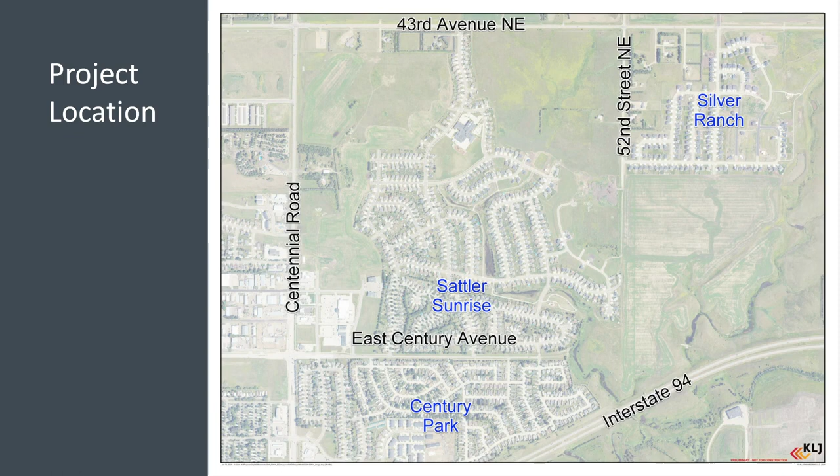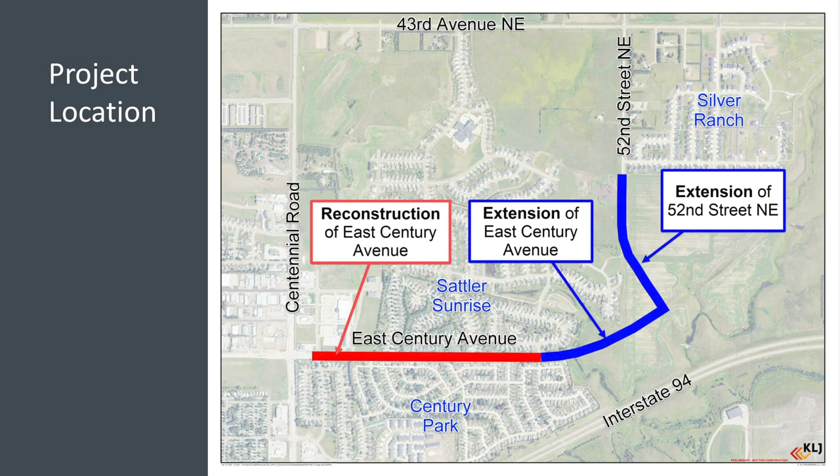The project will be divided into two segments: the reconstruction of the existing roadway and the new construction or extension of new roadways. The reconstruction segment includes the existing East Century Avenue roadway from Centennial Road to Kost Drive, shown in red. The new construction segment extends East Century Avenue further east until it intersects 52nd Street, and 52nd Street would be extended south to intersect the new East Century roadway. These extensions are shown in blue.

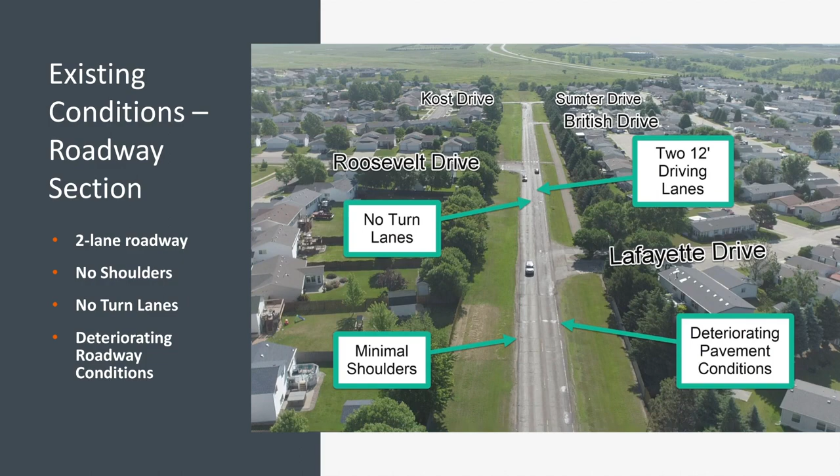The existing roadway for East Century Avenue consists of a rural two-lane roadway with 12-foot driving lanes. There are no turning lanes, and the pavement condition is deteriorating.

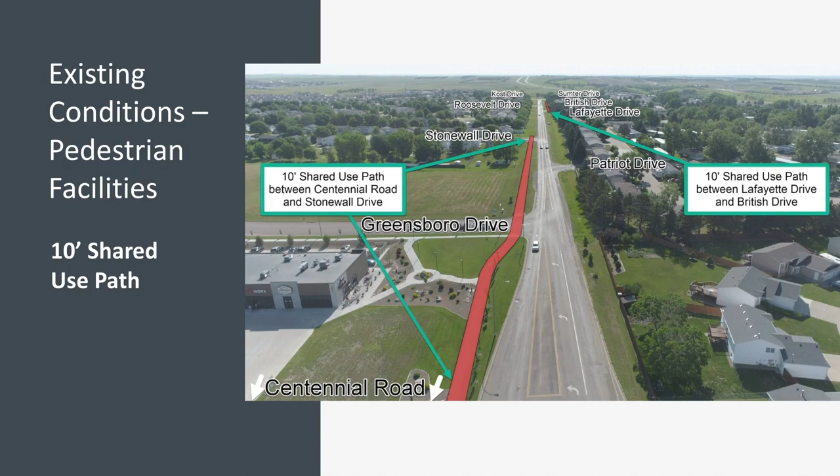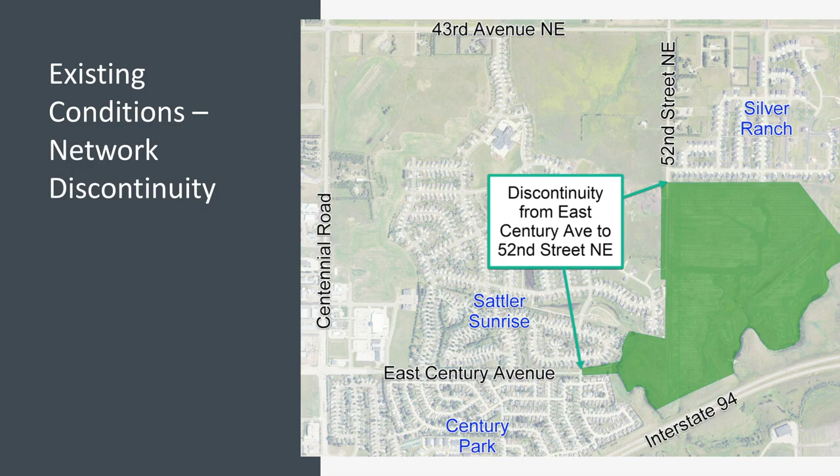The corridor has some pedestrian facilities, including a 10-foot shared use path between Centennial Road and Stonewall Drive on the north side of East Century Avenue, and another 10-foot shared use path between Lafayette Drive and British Drive on the south side. Currently, East Century Avenue ends at the intersection of Kost Drive, and 52nd Street ends at the intersection of Gold Drive. There is a discontinuity between these two roadways as they do not currently connect with one another.

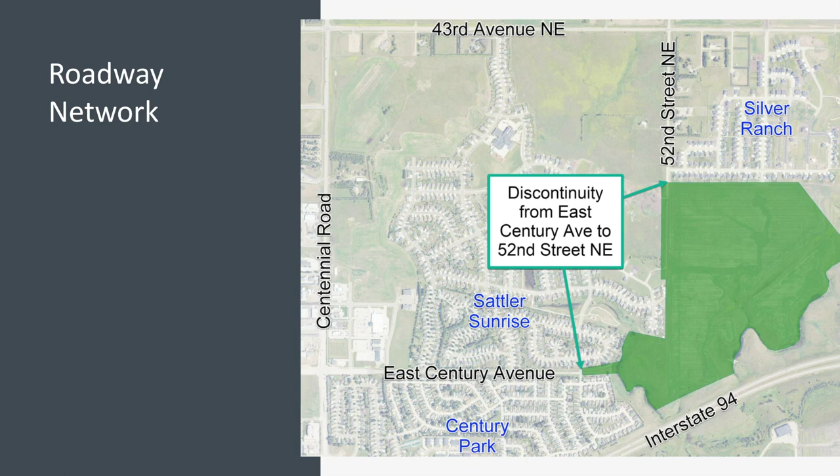A traffic operations report was completed for this project that considered future improvements throughout this region, aligned with Bismarck's long-range master transportation plan. As part of that report, the project team reviewed the extensions of East Century Avenue and 52nd Street Northeast. There were many considerations when determining the alignments of these roadways and where they intersect one another.

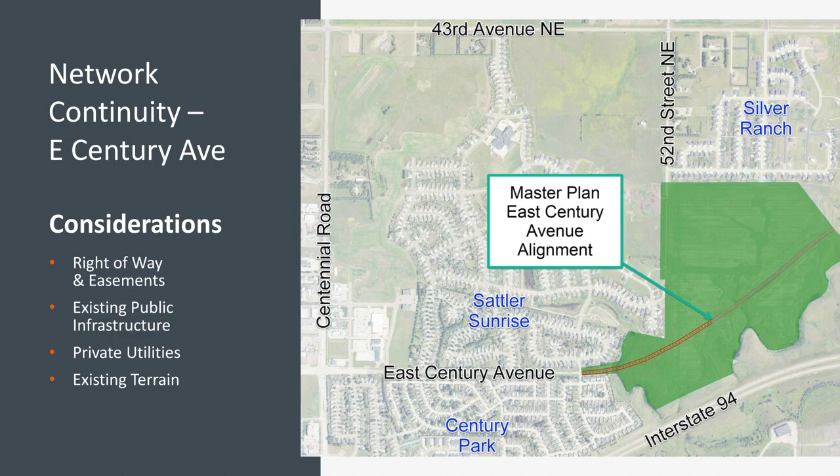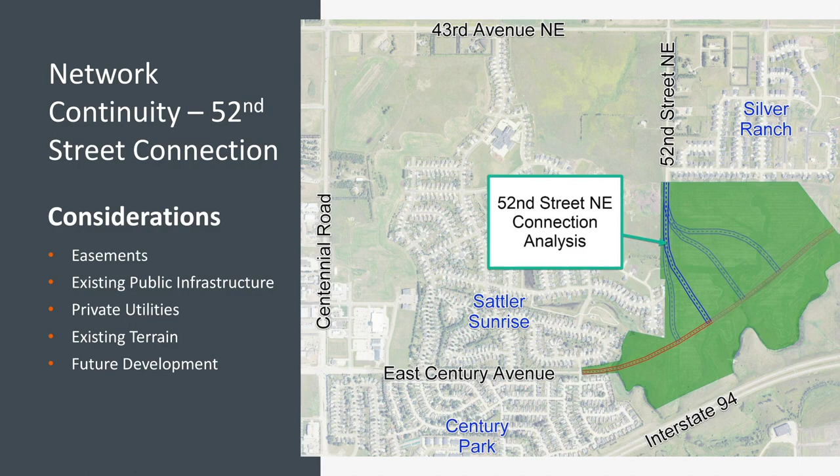For the extension of 52nd Street Northeast, the alignment has many of the same considerations. The project team reviewed several different alignment alternatives for 52nd Street, shown on this slide in blue. The proposed alignments must also consider any potential future improvements identified in the city's master transportation plan.

A potential grade-separated crossing at Interstate 94 was identified in the city's master plan. Though not part of the proposed improvements of this project, the project team completed a feasibility review of roadway alignments and profiles for this grade-separated crossing to help determine alignments, profiles, and intersection locations for East Century Avenue and 52nd Street Northeast. The review included 7 different alignment alternatives with options for crossing over Interstate 94 with an overpass, as well as crossing under with an underpass.

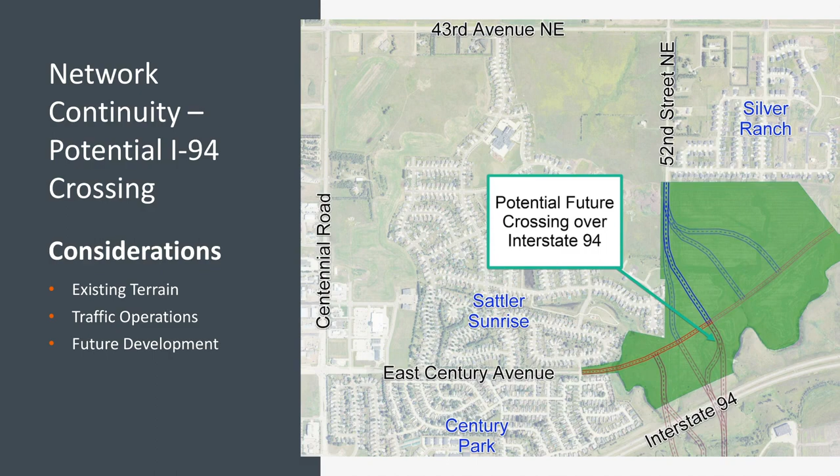The traffic operations report also provided recommendations for the proposed improvements that accommodate future vehicular traffic volumes and provide safe multimodal facilities for pedestrians and bicyclists.

This is the proposed typical section for East Century Avenue along the reconstruction area between Centennial Drive and just east of Kost Drive. The roadway would include 2 westbound driving lanes, 2 eastbound driving lanes, and a center left turn lane. Pedestrian facilities include a 10-foot shared use path along the north side and a 6-foot sidewalk on the south. Due to limited right-of-way and existing ground terrain, some retaining walls may be required at various locations.

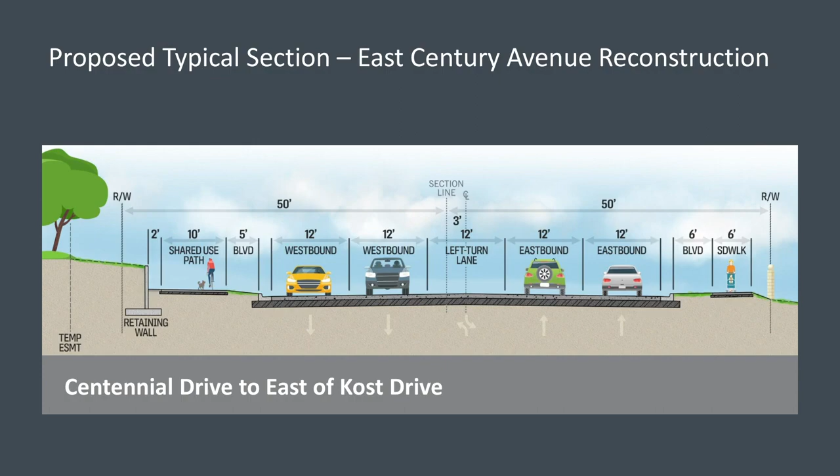The extension of East Century Avenue currently has 2 proposed alignments. The first option would transition down to a rural 2-lane roadway, as shown on the left, with asphalt surfacing, 12-foot driving lanes, and 4-foot shoulders. The roadway would be built wide enough to accommodate widening the asphalt so a center left turn lane could be provided in the future.

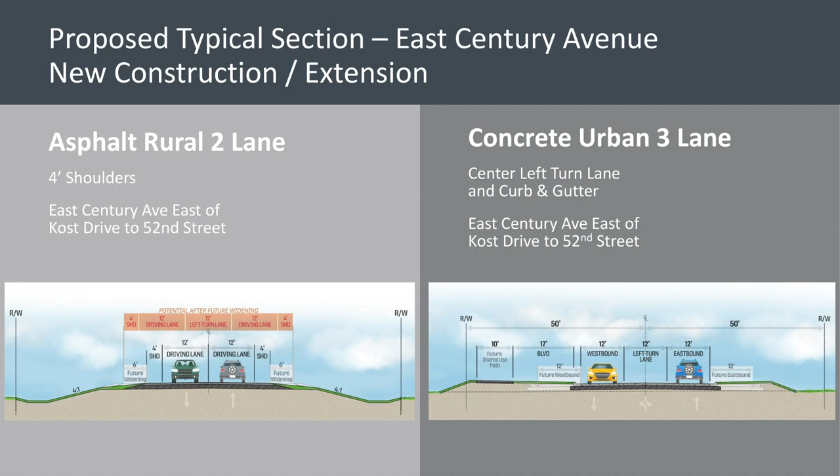The second option would transition down to an urbanized 3-lane roadway, as shown on the right, with concrete surfacing, 12-foot driving lanes, a center left turn lane, and curb and gutter. For this option, the roadway would be built wide enough to accommodate a future shared use path along the north side of East Century and an additional 2 driving lanes, one in each direction.

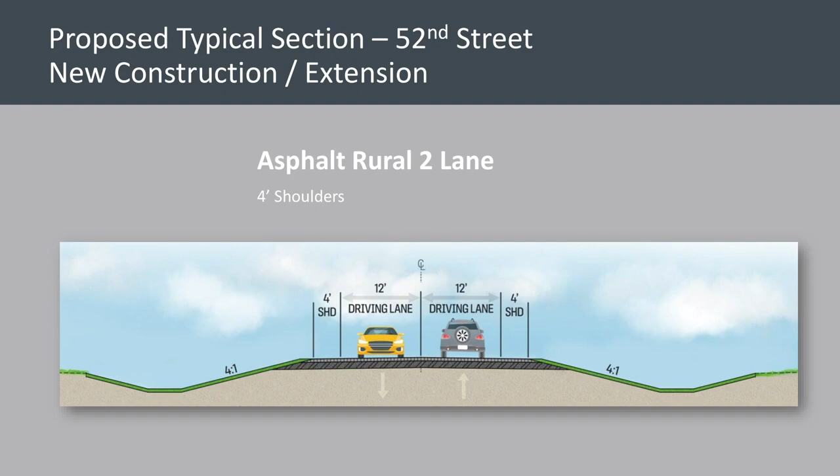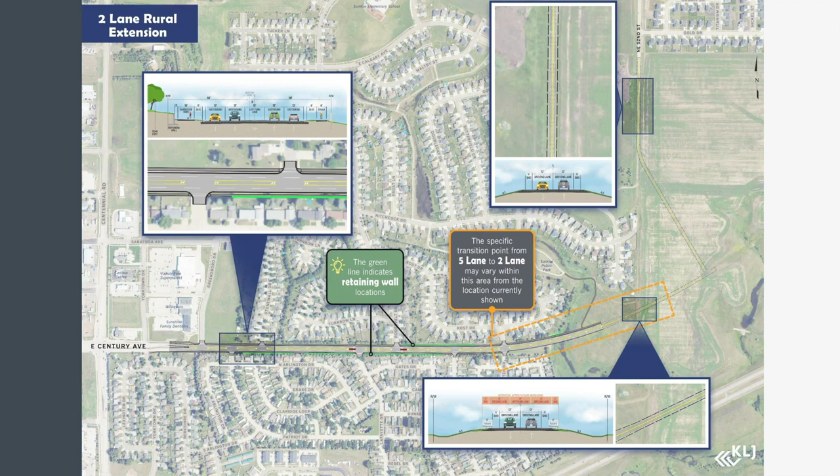This exhibit shows all proposed improvements along the corridor for the 3-lane urban section extension of East Century Avenue. A 5-lane urban section begins just east of Centennial Road and continues until it crosses the Sunrise tributary just east of Kost Drive. The roadway then transitions from the urban 5-lane section to an urban 3-lane section.

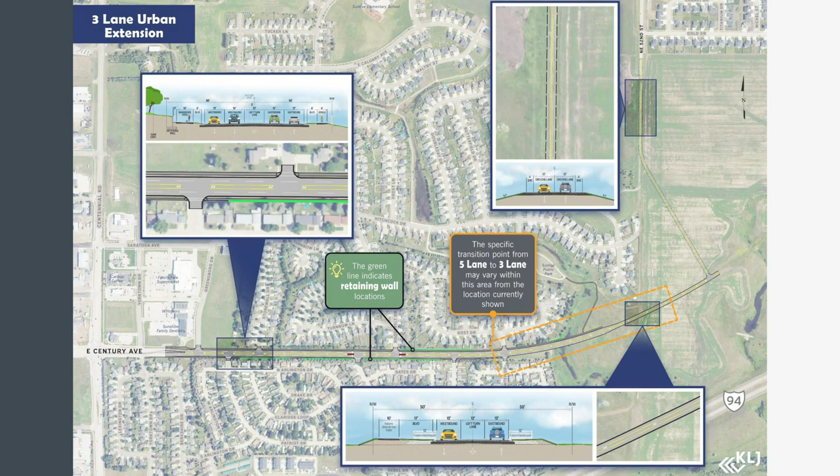Please note that the exact location of this transition may vary within the boxed region shown. Along the reconstruction area of East Century Avenue, pedestrian and bicycle facilities are being proposed with some additional features such as raised medians, pedestrian refuge islands, and rapid flashing beacons.

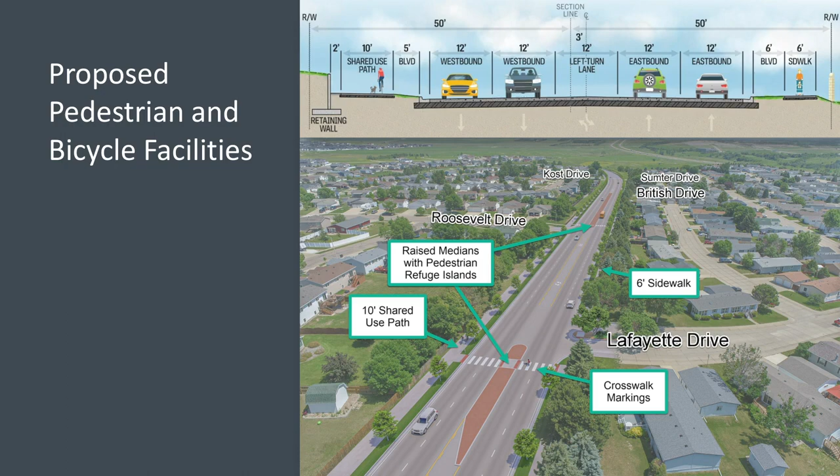As previously noted, the proposed typical section includes a 10-foot shared use path along the north and a 6-foot sidewalk along the south. The Traffic Operations Report recommended improvements to the existing pedestrian crossing at Roosevelt Drive.

The proposed improvements include a raised median with a pedestrian refuge island. Due to the configuration of intersecting roadways throughout the corridor, these raised medians with pedestrian refuge islands could be placed at many other intersections. These raised medians would be positioned such that they do not restrict intersection access, but still allow for pedestrians to cross East Century Avenue.

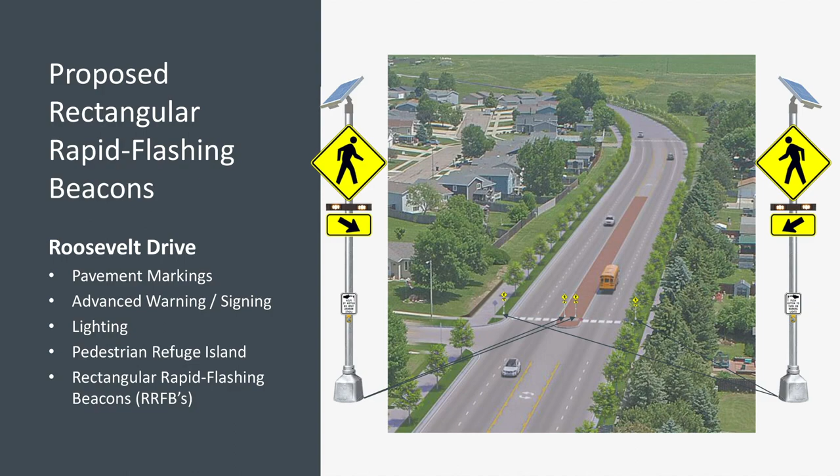The Traffic Operations Report also recommended the installation of rectangular rapid flashing beacons for the pedestrian crossing at Roosevelt Drive. Additional improvements, such as high visibility pavement markings, advanced warning signing, and lighting, were also recommended to improve pedestrian safety.

Lastly, the project team has been working with Bismarck Parks and Recreation with options to provide a shared use path connection from Sunrise Park to East Century Avenue along the Sunrise tributary. The potential addition of this path may or may not be completed as part of this project, depending on how it would be funded through coordination with Bismarck Parks and Recreation.

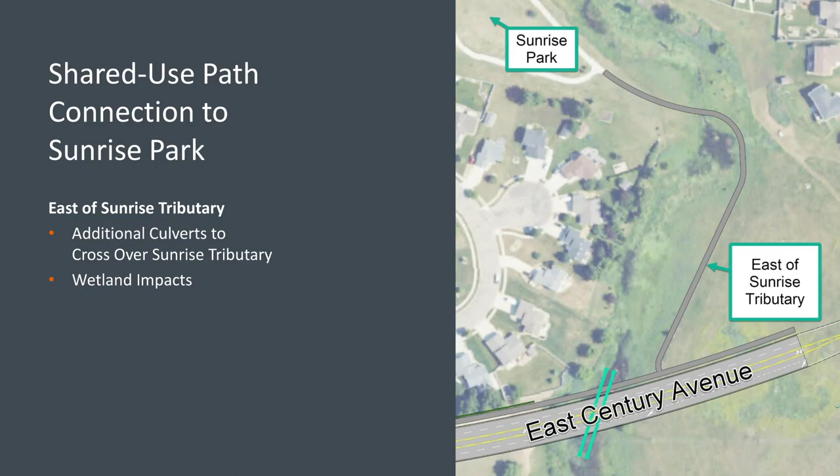The connection would cross the tributary immediately east of Sunrise Park, parallel the east side of Sunrise tributary before connecting to the shared use path paralleling East Century Avenue.

We'd also like to inform you about some of the impacts caused by these project improvements, such as wetland, right-of-way, costs, and construction phasing. A common environmental impact that is found with reconstruction and new construction projects is wetland impacts.

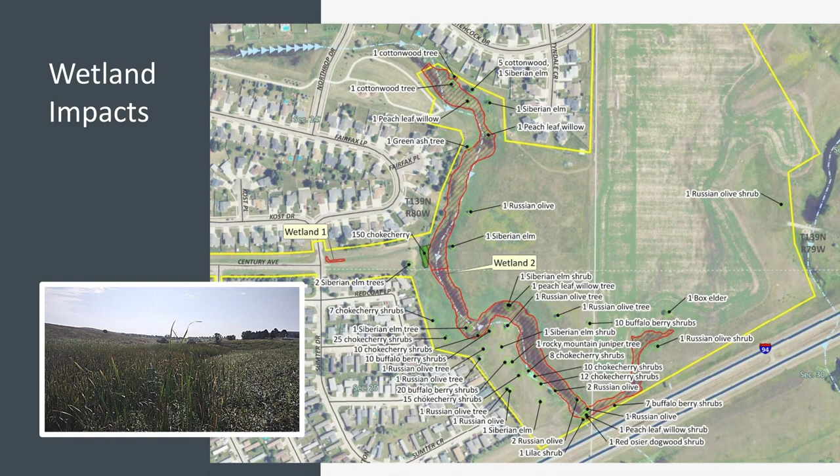The project study area was reviewed for existing wetlands which were surveyed so that we can determine impact areas. Though we do attempt to reduce or eliminate impacts as much as possible, permanent and temporary impacts will be unavoidable where the roadway crosses the Sunrise tributary. Current preliminary estimates have identified approximately half an acre of permanent wetland impacts as a result of these project improvements.

Another common impact for these projects is the need for temporary and permanent right-of-way. Along the reconstruction area between Centennial Road and Kost Drive, temporary construction easements will be required. These easements are necessary for grading embankment and/or allowing space to construct items like retaining walls.

Any impacts to private property, such as fence, irrigation, and landscaping, would be restored to their existing conditions upon completion of the project. Along the new construction or extension of East Century Avenue and 52nd Street Northeast, both permanent right-of-way and temporary construction easements would be required.

As noted on the screen, the City of Bismarck has already secured some of the roadway right-of-way required for the extension of East Century, but additional permanent right-of-way would be required in the area shaded in red.

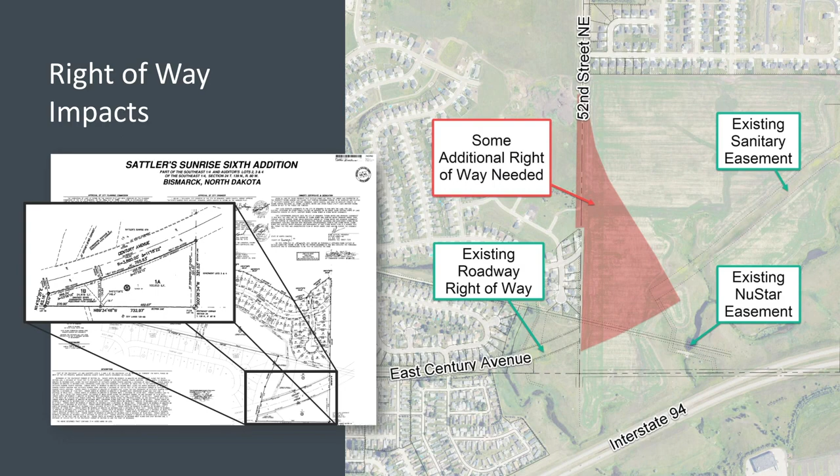As with most roadway projects, there will be impacts to traffic, such as road closures and detours. East Century Avenue will need to be closed to construct the proposed improvements. Each development does have alternative access points, such as access to Century Park development at the intersection of Trenton Drive and Centennial Road, and access to Sattler Sunrise development at the intersection of Roosevelt Drive and 43rd Avenue.

Detour routes could be provided for these alternative accesses. Other options are also being considered to reduce traffic congestion, such as maintaining temporary access on East Century Avenue from Centennial Road to Patriot Drive and Stonewall Drive.

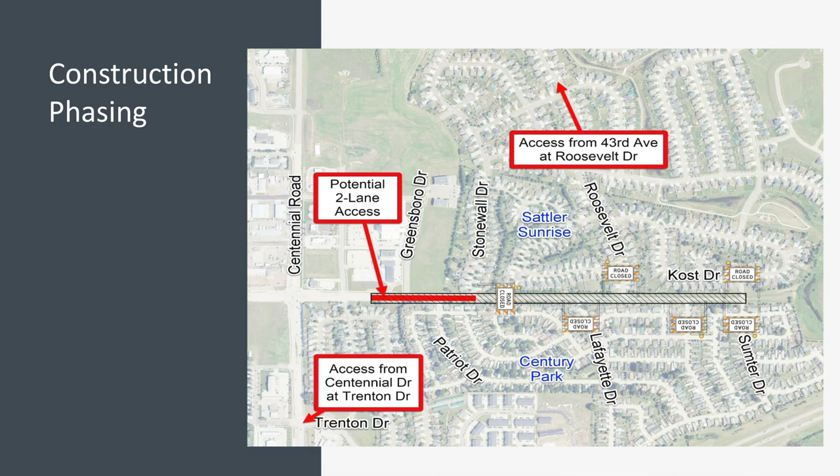We are aware of the proposed improvements to the Centennial and Expressway interchange with I-94 that will also impact traffic in this area, of which we are taking into consideration for this project.

The project improvement costs vary depending on the alternative selected. Alternative 1, with the 2-lane rural extension, is estimated at $26.3 million. Alternative 2, with the 3-lane urban extension, is estimated at $27.8 million. The optional shared use path extension to Sunrise Park is estimated at $800,000.

These estimates provided are the engineer's opinion of costs for all improvements and include construction, engineering, right-of-way, wetland mitigation, and utility relocation costs. The project is anticipated to be funded through the half-cent sales tax, with the water utility covering water main costs. Funding for 52nd Street will be determined through City Commission direction at a later date.

Lastly, funding for the optional shared use path connection is pending coordination with Bismarck Parks and Recreation. Preliminary design and environmental documentation for this project is currently ongoing and is anticipated to be completed in March or April after presenting to City Commission.

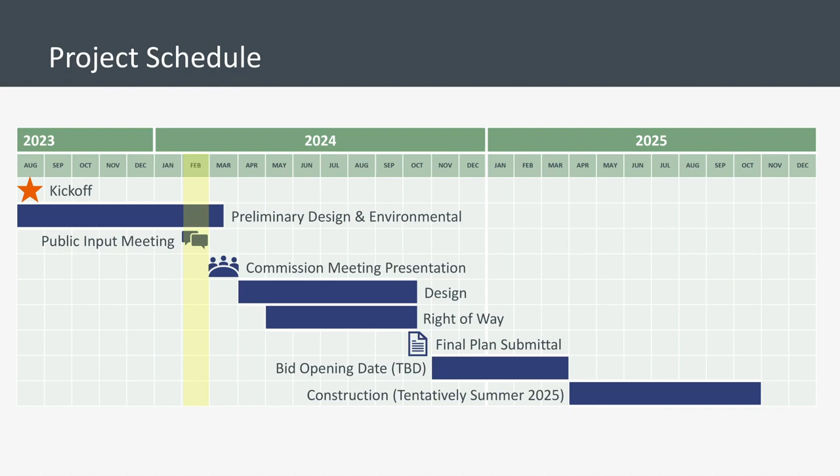Final design and right-of-way will immediately proceed after an alternative is selected. The design is anticipated to be completed in October of 2024, with a bid opening date expected in the fall or winter of 2024. Construction is tentatively planned for the summer of 2025 and is anticipated to be completed in the fall. Please note that these dates are subject to change.